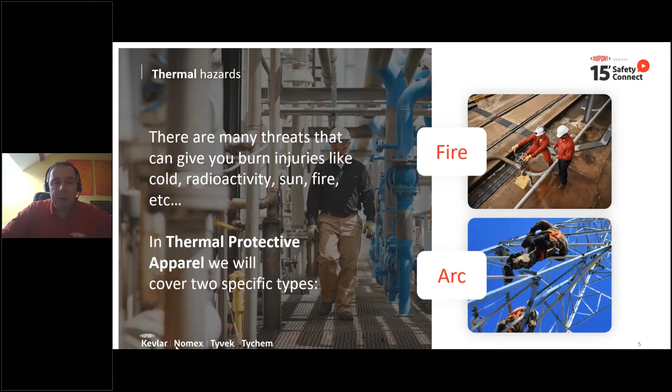Now, these two hazards are completely different. An electric arc happens when there's a fault in the electrical installation, and then an electrical arc is created by the energy, which will lead to an expansive explosion, melting all the parts of the electrical installations, creating very intense heat of up to 10,000 degrees centigrade and more during an extremely short time period of a few milliseconds only.

A fire, on the other hand, is completely different. For example, when you have excessive fuel that starts burning all of a sudden when it has a source of ignition. It is considerably less heat intense than an arc flash, having a maximum temperature of 800 to 1000 degrees C, but it can last significantly longer and spread much faster than an electrical arc does.

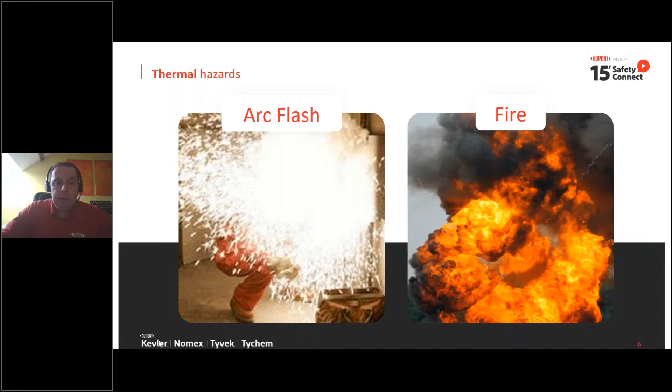And that's the reason why there are different norms and standards for these two hazards, because by nature these events are totally different. So it makes sense to have different standards to evaluate the garments against. For the fire hazards and all linked hazards like molten metal splashes, contact heat, etc., you have the ISO 11612 in Europe covering that. There are a series of tests run under ISO 11612 that we will detail in a few minutes.

For the electric arc hazard protection, you have a global standard in the IEC 61482-2, which is allowing two ways of testing the garments. That's the open arc and the box arc testing methods that we will detail as well in a few minutes.

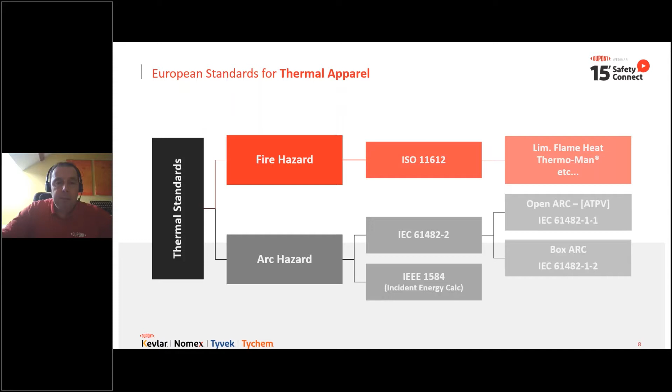Let's first start with the ISO 11612 for the flame protection. The 11612 is detailing all the levels of tests that should be done on the fabric samples only. Now you see that there's only one of these fabric tests that is mandatory, and that's the limited flame spread, identified by the code letter A, according to EN ISO 14116 from 2015.

And then you need to do one of the other fabric tests. One of them is mandatory, but you can choose which one you want to do, and you can also do them all, of course. These are convective heat, identified by the code letter B, radiant heat, code letter C, molten metal splashes, code letters D and E, and finally contact heat with the code letter F. As I said, these are all fabric tests only, on pieces of fabric, not on full garments. There is one optional test for testing the performance of complete garments, and that's the thermal mannequin test.

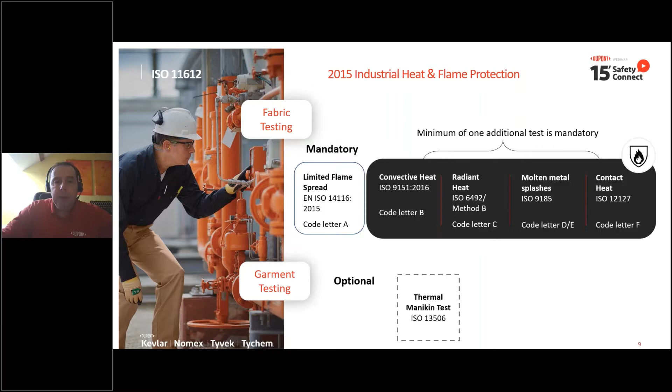Now, as I said, this is optional, it's not mandatory, but it's a very interesting test, as you will see as well in a couple of minutes. But first, let's start with the mandatory test, and that's the limited flame spread test.

So here you see a graph and a picture of the buildup of these testing methods. So what you're doing is you take a Bunsen burner and you put it during a short period of time in contact with the fabric you want to test. And then you're removing the burner and you're evaluating how the fabric performed.

As you see in the table on the left side of your screen, there are 3 index levels of performance with varying requirements. Now, in order to have a limited flame spread approved fabric, you cannot have any flame spreading, of course. So meaning the material should not burn by itself once you have removed the Bunsen burner. You shall not have any flaming debris either. And the afterglow should last lower than 2 seconds.

Now, the distinction between the 3 levels of performance is determined by the hole formation and the afterflame. While you can have a hole formation and an afterflame for index 1, you are not allowed to have any hole formation for indexes 2 and 3. While you can have an afterflame lasting longer than 2 seconds for index 2, you must be below 2 seconds for index 3.

There are 2 ways you can test the fabrics. You can either use the surface ignition testing by putting the Bunsen burner straight onto your fabric, or you can do the edge ignition, which is procedure B. Both are shown on the graphs on the right-hand side of your screen. So that's the only mandatory fabric test according to the standards.

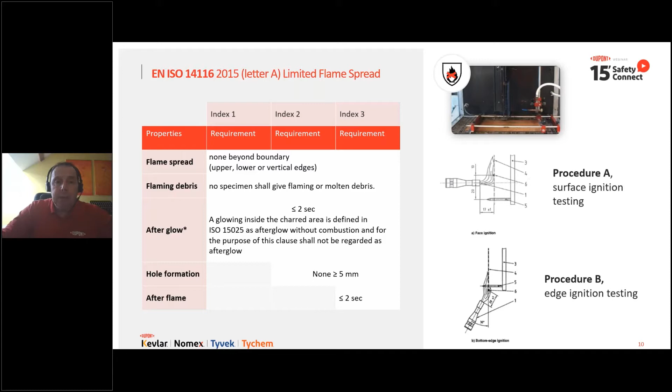Now, the other tests you can freely choose from, but before we go to that, I will show you some pictures of how different materials perform during that testing. So you see here the difference between cotton and an FR material, whereas the cotton instantly catches fire and keeps on burning even when you have removed the Bunsen burner.

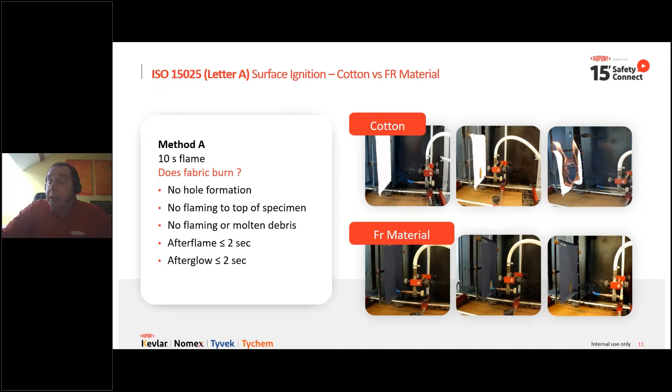With an FR material, a flame-resistant material like Nomex, that is not the case, as you see in the lower side of the picture. You have just the color that has burned, but once you remove the Bunsen burner, you see that the material by itself is not burning. So after the 10 seconds flame, you will check if there's a hole formation, flaming debris, an afterflame or an afterglow, and you assess your material according to its performance.

Now let's move to the other tests, which are free to choose from or can all be done. And I will start with convective heat, which is identified by the letter B and is defined by the ISO 9151 standard. So here you see both a picture and a graph of the testing methods.

So you put the sample you want to test below a calorimeter, and below your sample you are creating a heat source of 80 kilowatts per square meter using the device below, and then you're measuring the time it takes for the temperature on the calorimeter to rise to the level of pain or to the level of second-degree burns.

Now, the level of pain is the moment in time where you feel the heat of the burn without having sustained a skin injury already. And that is happening when the temperature on your skin has increased by 12 degrees centigrade. You only get a second-degree burn once your temperature has increased by 24 degrees centigrade on your skin.

And for rating the performance levels of convective heat, that's exactly the point that you're going to take. You're measuring the time in seconds it takes to raise the temperature by 24 degrees centigrade, in other words, which would lead to second-degree burns. And then you get the performance level between B1, the lowest, and B3, the highest.

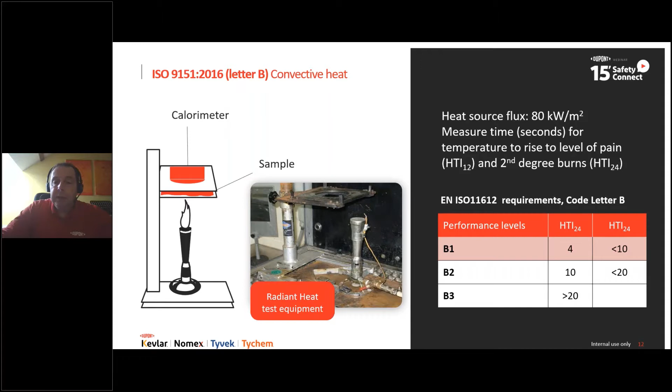Now, if it takes more than 4 seconds but less than 10 seconds to achieve this point of burn, then you have a B1 level of performance. If it takes between 10 and less than 20 seconds, you have a B2 performance. If it takes longer than 20 seconds to achieve the level of second-degree burns, you have a B3 performance in the convective heat test.

Then the next test I want to show you is the radiant heat test method, and this is identified by the code letter C. Again, here you see a graph and you see a picture of the equipment. So you have a heat source of heated metal rods that have a temperature of 1100 degrees centigrade on the surface, and you have at a certain distance both the sample of your material you want to test and your calorimeter that is measuring the temperature, and between the two you have a radiant heat of 20 kilowatt per meter square.

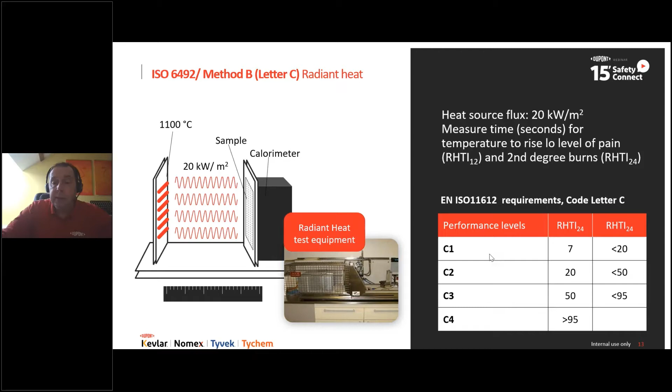And here the same principle as before, you're measuring the time it takes for the calorimeter to detect a temperature increase of up to 24 degrees centigrade. In other words, the point of skin burns. And then you rate your performance levels based on that into levels C1 to C4. Again, it's the same principle as you can see here on the table. If it takes more than 7 seconds and less than 20 seconds, you have a C1 performance. And if it takes more than 50 seconds and less than 95 seconds, you have a performance level C3.

Now, the molten metal splash test is a little different in nature, and this is identified by the code letters D for molten aluminium and code letter E for molten iron splash. Now, the test setup is demonstrated here in the graph on the left-hand side of your screen. What you're doing is you're pouring a predefined quantity of molten aluminium or molten iron onto your material you want to test, for example, Nomex, and beneath that layer of Nomex, you have an artificial skin that is reacting more or less like your skin would do if you pour molten metal on it. So you're checking if this artificial skin is sustaining any damage or not after having been exposed during 30 seconds to a predefined quantity of molten metal.

Now, this is a pass-fail test, and you always start at the lowest level. For example, at the molten aluminium splash, at the performance level D1, you take 100 grams of molten aluminium that you're pouring on your fabric, on your Nomex, for example, and you wait for 30 seconds, and then you're checking if your artificial skin has been damaged or not. If it's not damaged, you pass already the level D1. And then you take a new piece of fabric, a new piece of artificial skin, and then you do the same test, but this time with 200 grams of molten aluminium splash. If you pass this, you have the level D2, and you go to the 350 grams that you're splashing onto your Nomex.

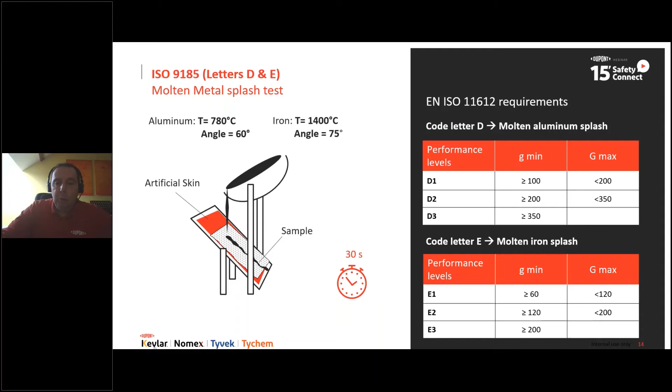Now, the last fabric test that you can choose from is contact heat, identified by code letter F. Here you have a heat source of 250 degrees centigrade. You put your material onto that, and then with a gap of 10 millimeters, you have a sensor below, and you're measuring the time it takes to have a temperature increase of 10 degrees centigrade, so well below the point of pain. And here you have, again, 3 performance levels, F1 to F3, and the test goes like that. If it takes more than 5 seconds, but less than 10 seconds to have a temperature increase of 10 degrees centigrade, you have level F1. If it takes between 10 and less than 15 seconds, F2, and if it takes longer than 15 seconds of contact heat, you achieve level F3.

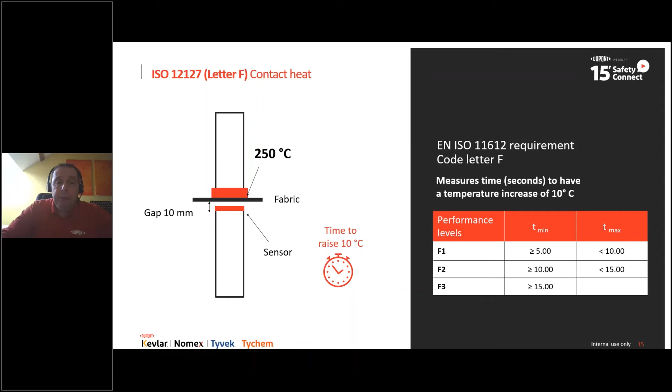Now, you may wonder why there's a gap of 10 millimeters between the fabric and your sensor. Well, very simply, because there's always a gap between your skin and the garments you are wearing, and typically that's more or less 10 millimeters. So you may be in direct contact with a hot pipe, for example, but unless you're really kneeling and exerting pressure on it, you'll have the gap between your fabric, your garment, and your skin, hence the 10 millimeters.

Now, as I said, all these tests are done on fabric samples only. So you're not getting a real assessment of a full garment. In order to assess a full garment, the mannequin test, according to ISO 13506, is a very good method indeed, because here you can dress a mannequin with the garments you want to wear, and you are exposing that to a full flame engulfment between 3 and 20 seconds. The industrial standard in Europe is 4 seconds.

And you generate heat and flames with 12 propane burners that will fully engulf the mannequin, generate a heat between 600 and 1000 degrees centigrade inside the chamber. And you're measuring the heat going through the garments with the 122 heat sensors that are a little bit everywhere on the mannequin. Now, with that, you really get concrete data.

You will see what is the level of second and third degree burns sustained after such a flash fire exposure. You see where the burns happened. And with the translation according to the Stoll curve, you also see the chances of survival based on the burn rate injury that would have been sustained in such a case. I will now pause a minute. I will show you a video on our Thermoman testing methods that we have at DuPont.

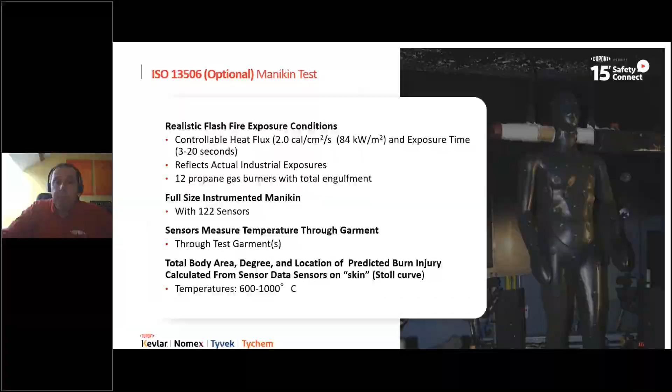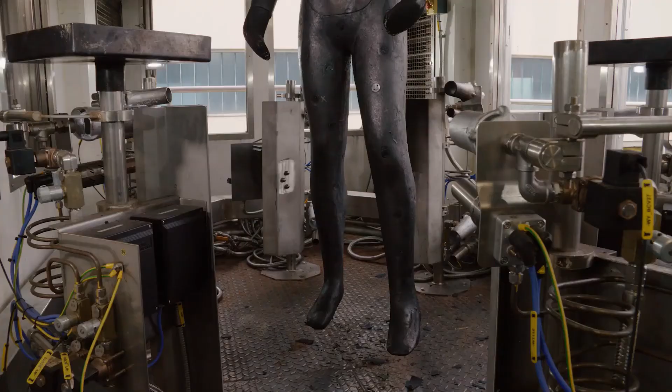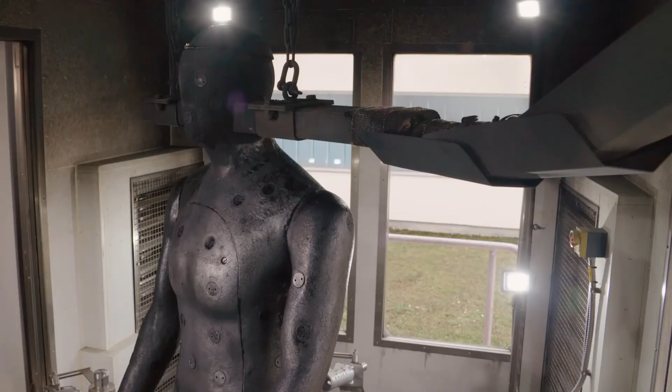Developed by DuPont and the US Air Force, Thermoman is built inside a container for conducting tests simulating the garment's exposure to direct fire with temperatures up to 1200 degrees Celsius. DuPont Thermoman is a life-sized mannequin equipped with 122 heat sensors. The sensors record the temperature rise on the surface of the mannequin. The computer calculates the predicted percentage of second and third degree burn injuries a person might suffer under similar conditions.

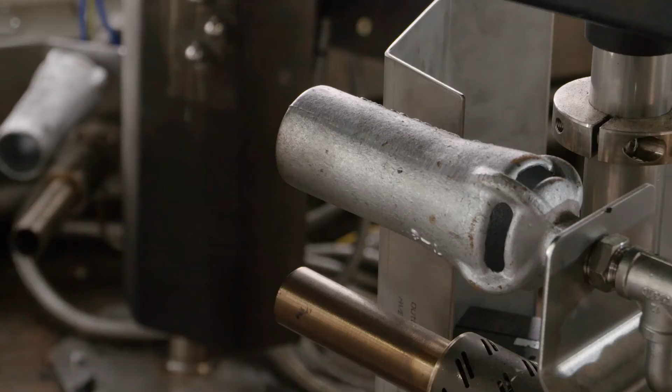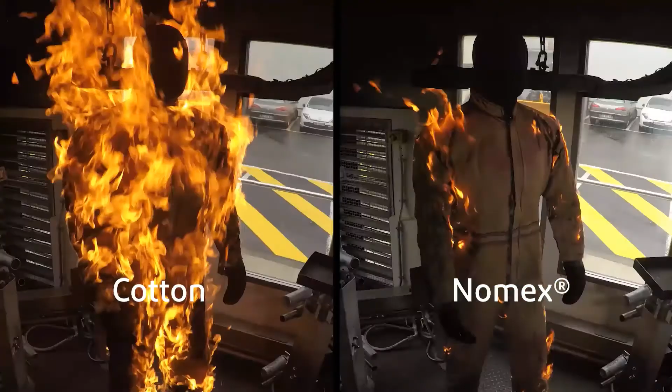Tests show that with exposure to the same flash fire, a worker dressed in cotton or polyester cotton could suffer combined second and third degree burns over up to 90% of his body. While for a worker protected by Nomex, the potential injury level could be contained to less than half, resulting in a lower degree of burn injury over a smaller body area, and thus substantially increasing his chances of survival and reducing recovery time.

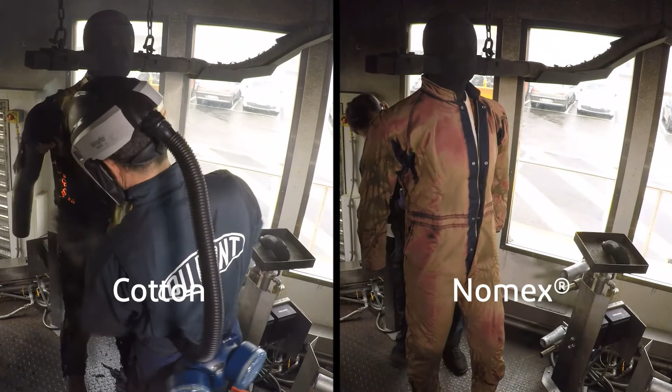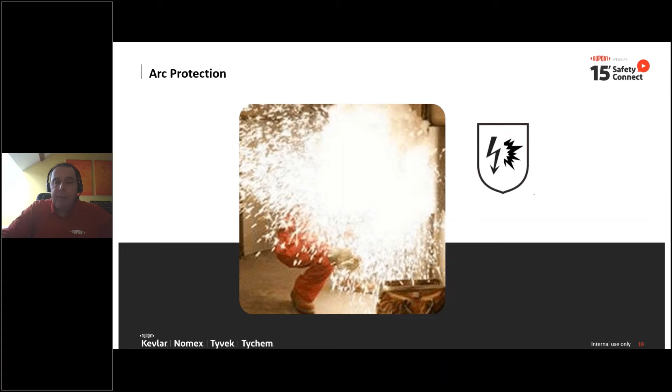Now that was interesting, wasn't it? Let's now move over to electrical arc protection, which, as I said, is a completely different hazard and also a different set of standards. In order to determine the incidence of electric arcs on PPE, the IEC 61482-2 is allowing two testing methods, the open arc test and the box test. There are two different concepts.

While the open arc test is one with an energy that can be determined based on the residual risk that you may be facing in your electrical installation, you will be getting an arc thermal performance value, ATPV, in calories per square centimeter, which is indicating the level of energy the garment can protect against. You will also have the break open threshold energy, which is also giving you the indication at what point the garment may break open.

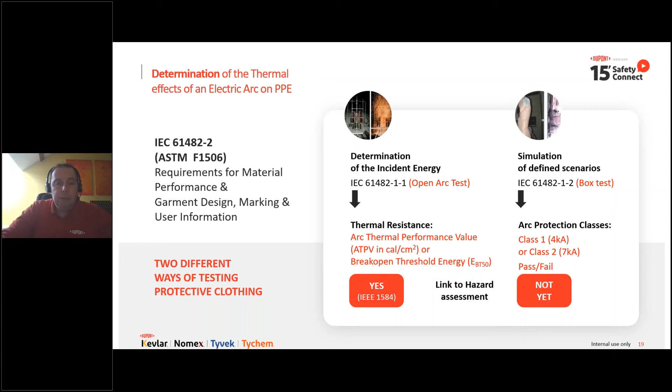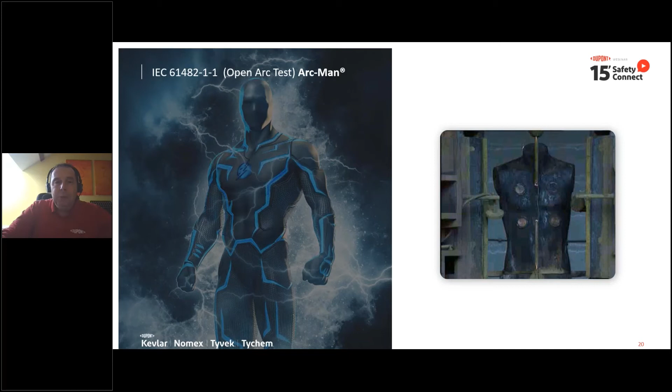Now, the box test is a completely different test method where you have only a pass-fail criteria and two levels of energies that are being used for measuring that. You have 4 kiloampere for class 1 and 7 kiloampere for class 2. I will detail the two testing methods in a minute, and I will just conclude by saying that the hazard assessment can be linked to the open arc test, but not yet for the box test. At DuPont, we not only have the Thermo-Man, we also have the Arc-Man. And again, I will pause in order to share a video on our Arc-Man.

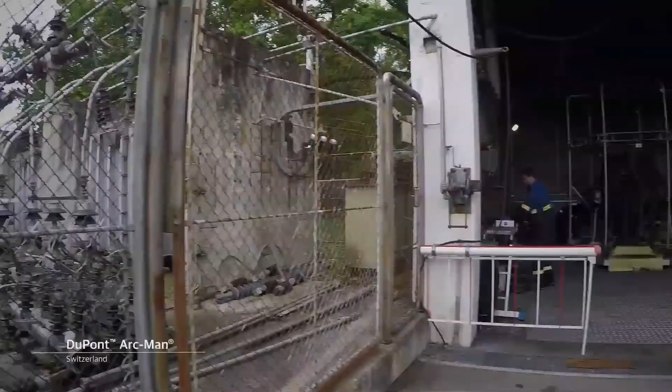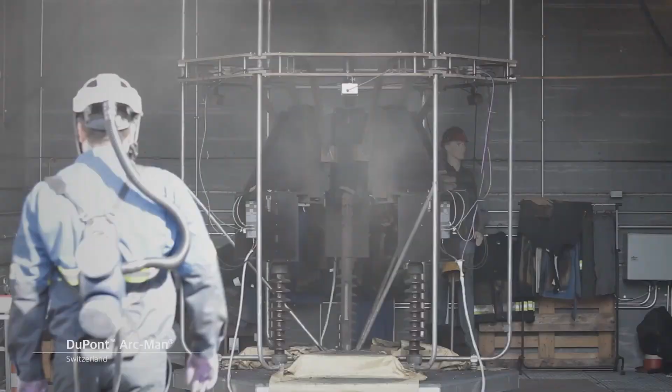Located in Switzerland, the CEF facility is fairly unique, not only in Europe, but also in the world. Approximately 60 kilometers away from the DuPont Technical Center, the CEF laboratory can generate up to 100,000 amps. DuPont has only one device in the world, but is also the only producer of high temperature resistant fibers that have these performance capabilities. There are only 3 open arc testing laboratories in existence in the world that follow the current international testing guidelines, which are located in Spain, Canada and Switzerland.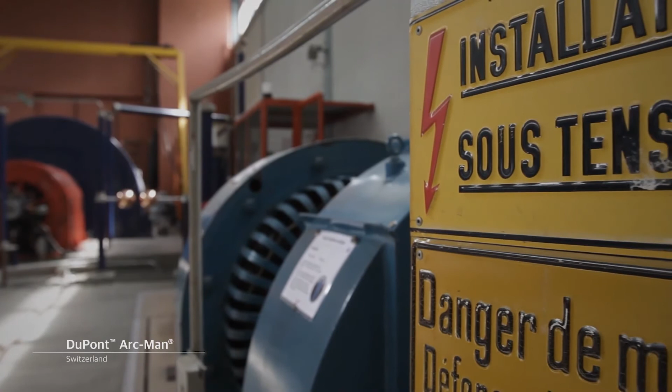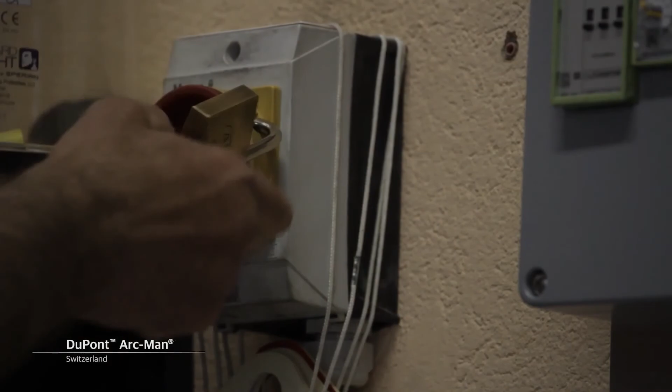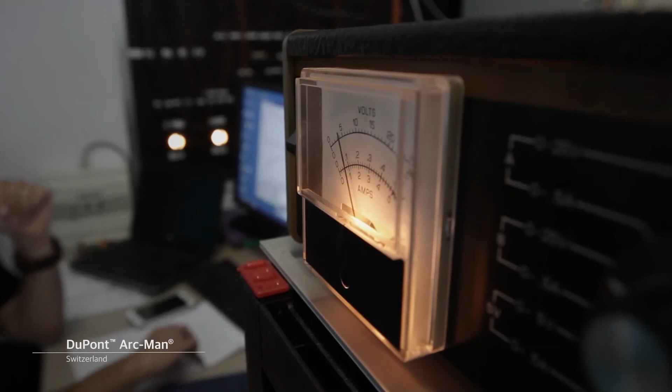At CEF, a collection of rotating machines, alternators and generators, with the most powerful being 500 MVA, almost 1/3 of a nuclear plant's capacity, are used to generate a very high level of current. This enables the laboratory to be totally disconnected and free from the grid while generating high currents. Therefore, there is no problem with the electricity supply to the surrounding area. The rotor weighs 20 tons. This allows for the accumulation of kinetic energy and its transformation to electric energy.

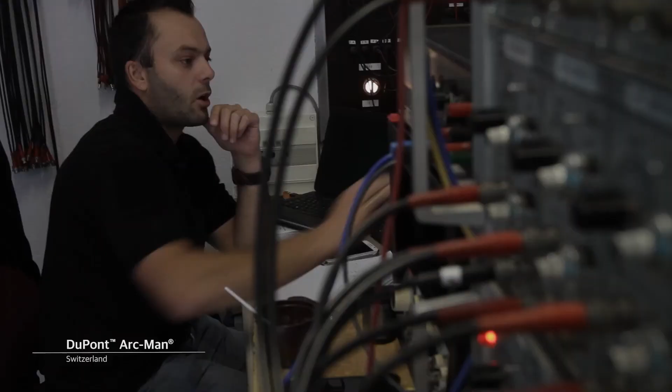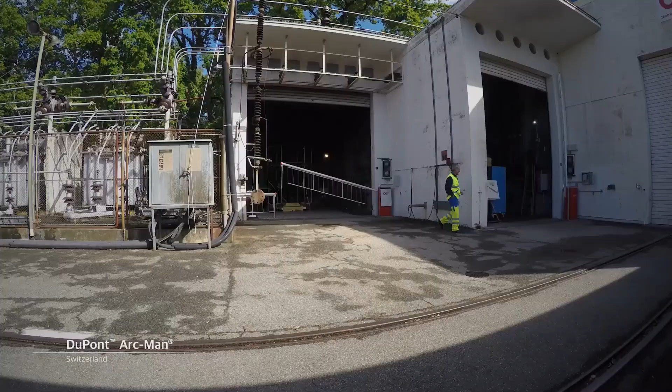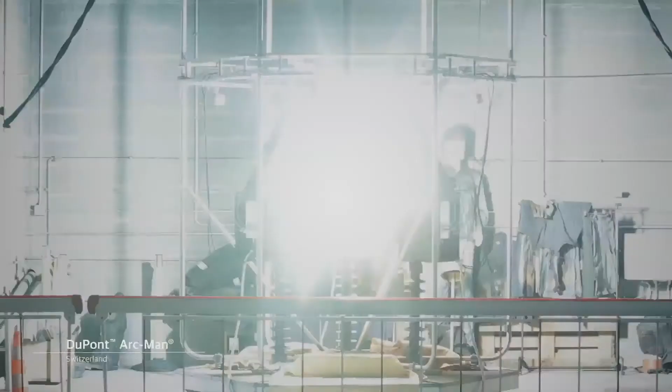The DuPont Arc-Man is a device for evaluating the thermal effect of an electrical arc on fabrics and/or garments. An electric arc is generated at the center of the cage, which enables us to expose the specimens to a high level of energy such that could be created during an incident in an electrical system. The open arc test determines the limit of the incident energy up to which a material or assembly will provide protection against the thermal effects of an electrical arc.

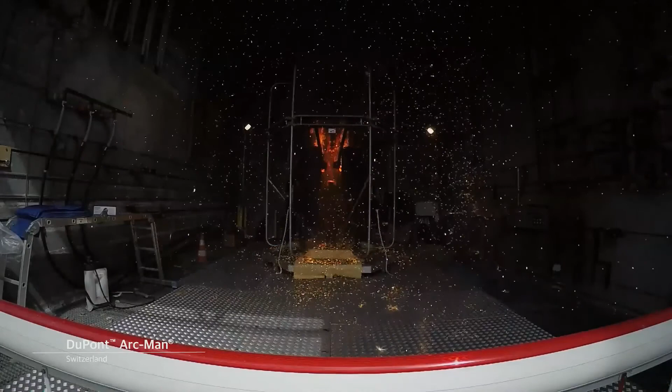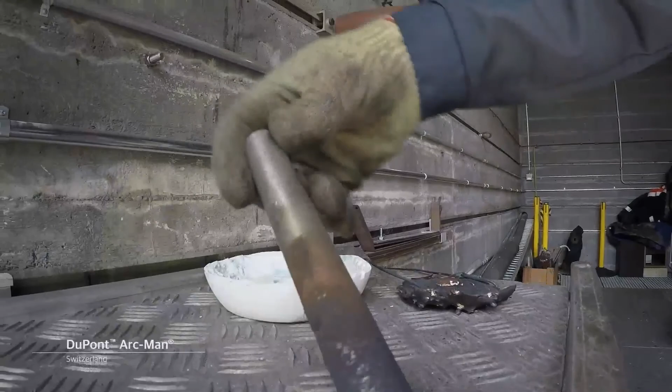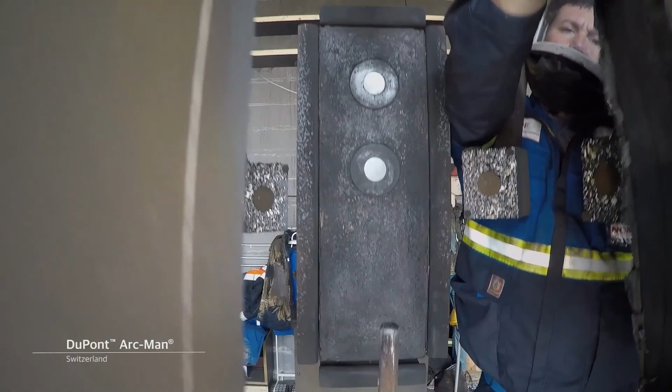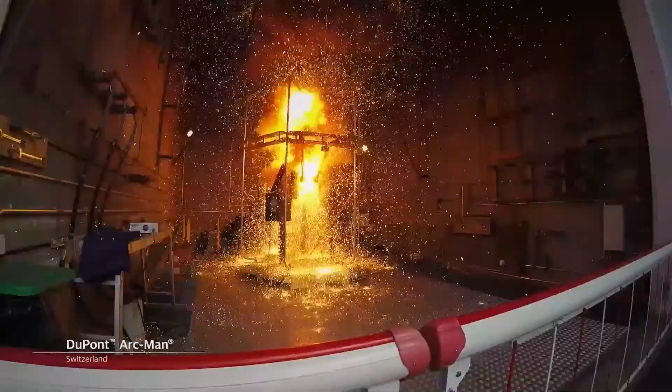The electrical arc is instantaneously ignited through the help of a 30 centimeter fuse wire laid across the gap between 2 stainless steel electrodes, which are positioned in the center of the test rig. The test voltage needs to be sufficient in order to maintain an electrical arc across the distance between the electrodes during the tests. This is typically between 2 and 4 kilovolts. The voltage drop along this arc is typically between 400 and 700 volts. The duration of the arc will vary from test shot to test shot, from 120 milliseconds to 2 seconds, in order to achieve the required incident arc energy.

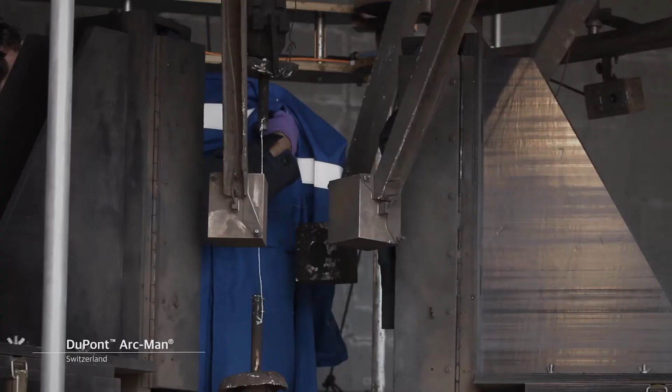Tests are to be carried out on fabrics to determine the arc rating, giving ATPV or EBT values, or on garments to assess the arc effect on accessories such as sewing threads, logos, reflective tapes, and so on. We have a Tandberg equipped conference room to which you can connect to experience live test sessions.

Now that was even more impressive, wasn't it? Let's now move over to the arc-in-a-box testing method, which is orienting the electrical arc, as you can see on the pictures and on the graph. So the idea behind this testing method is that a lot of accidents typically happen when an electrician is working on a small electrical installation, household level appliances, etc. So typically the arc is always hitting the chest of the electricians. And that's what we are doing here with the arc-in-a-box test method.

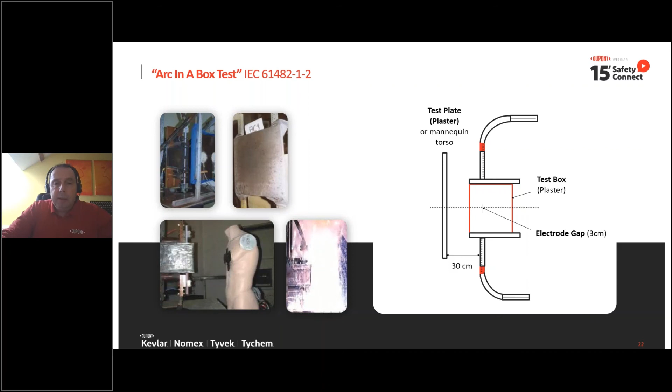So you are generating an electrical arc inside a test box, and you're orienting it towards the mannequin that is wearing the jacket. And then you're checking if the garment will be broken open due to the electric arc or not. So it's a pass-fail criteria. And the level of energy that you use for making the electric arc is either 4 or 7 kiloampere for class 1, respectively class 2. You are not getting, contrary to the open arc testing method, any indication on the burns that would have been sustained.